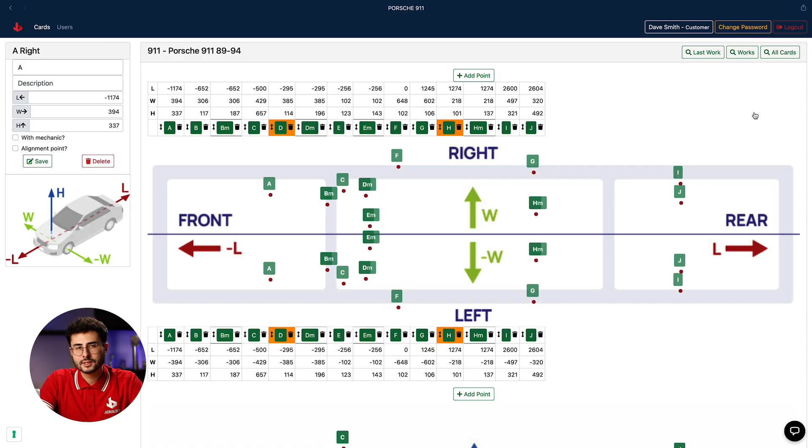In the previous video, we identified the alignment points, the stable and undamaged points on your car. For instance, I had defined point D and point H with the symmetrical ones as alignment points. It's important to focus a bit on these alignment points and especially verify their positions. They might seem to be in the correct position at first glance, which we hope for, but before repairing any damaged areas, it's always wise to verify if the alignment points are truly in their intended location.

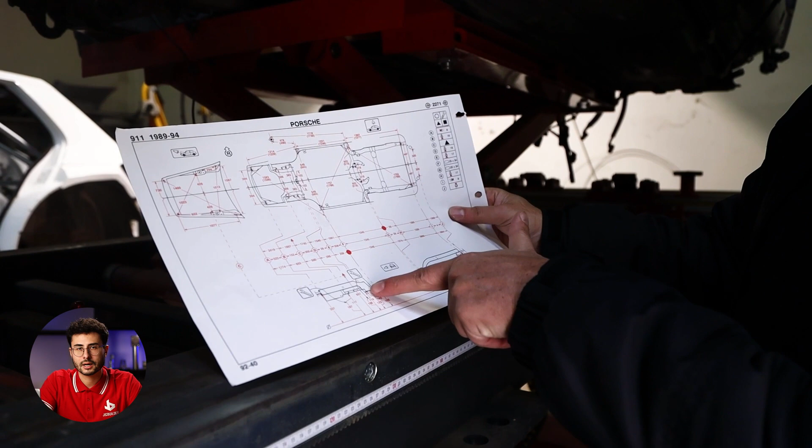To check the alignment point positions, we need to first identify them on the actual car structure. For this, all you'll need is some tape, a marker, and a bit of patience.

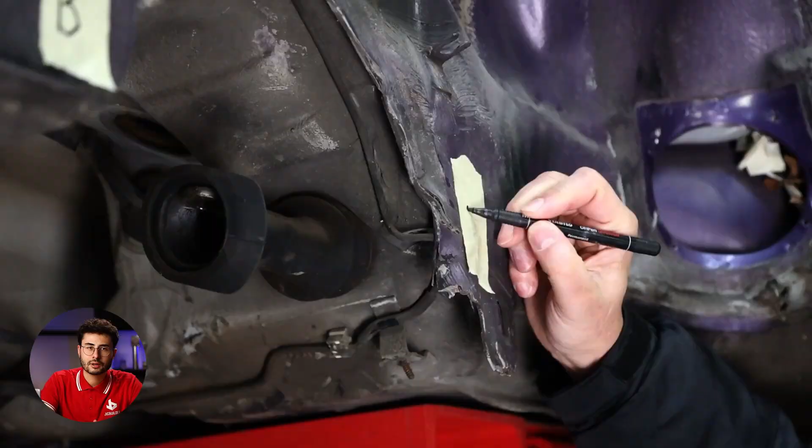After positioning the car on the bench, as you're surely used to, you'll mark on the physical car structure the points corresponding to the digital schema, using the marker to label them with their corresponding names. This phase of identifying the points is delicate and crucial to avoid any issues later on. Remember, JigBuilder requires a minimum of 4 alignment points for precise work.

Once the points are identified on the car, you can assemble the jigs as you are surely used to. I'll be waiting here for you once you're done with this task.

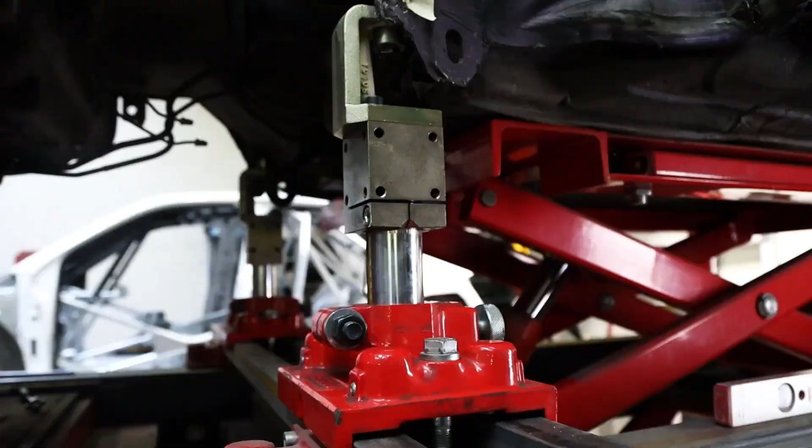Done? Great. Now let's return to our digital card. Once the card is open, click on the Works button, then Add Work.

The app will ask you to enter a description of the work you're about to do. In my case, I'm repairing a door, so my description will be Door Repair.

Additionally, the app will ask you to indicate the type of jigs you used on the real model. It's crucial to select the correct jig model that you are using. In my case, I select Coiro jigs. In the app, all the main jig brands are available to be selected: Global Jig, Thermomechanical Jig, Spanesi, PDA.

At this point, you'll find a screen with the basic points that you have previously entered in the card. The alignment points you selected in the card are shown in grey. What you need to do is to insert the coordinates of the alignment points resulting from the jigs.

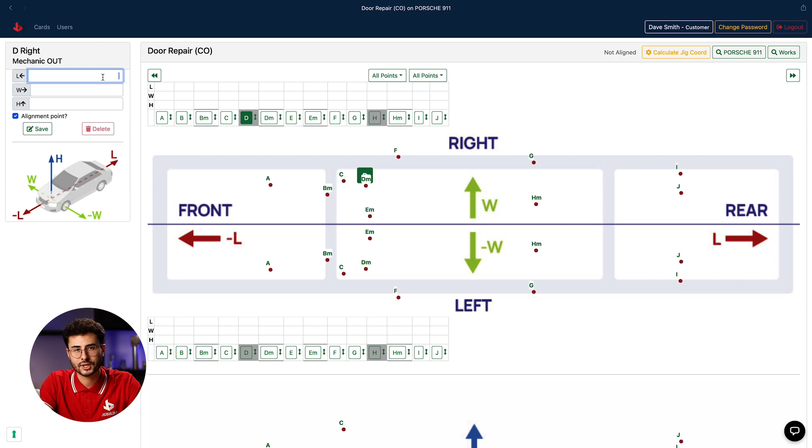Pay attention. Keep in mind to enter the negative or positive coordinate values as shown in the previous video. The arrows and letters on the application's base diagram will help you understand when the values need to be negative and when not. After entering the coordinates of the points, click on the first point again.

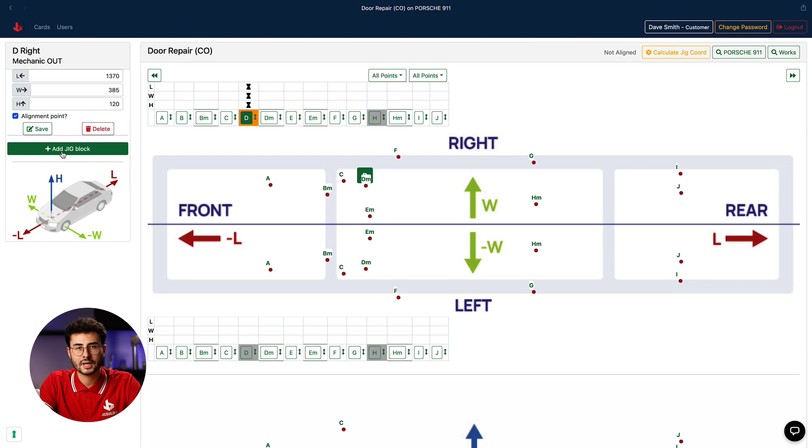You'll notice a new button under the table on the left side of the screen. Add Jig Block. What's it for? With this button, you'll select the jigs you used to reach that specific point. This way, the app can now verify if the alignment points on your car match the position they should have according to the card.

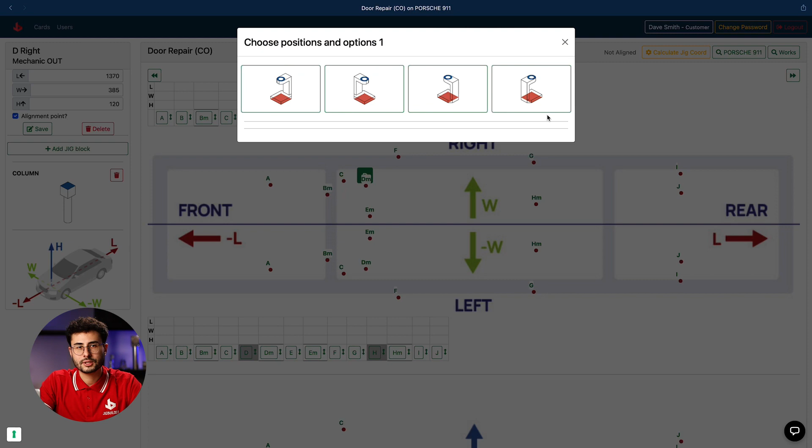Pay attention, you must be very careful in selecting the correct orientation for each piece. The colored face of the digital template indicates the face you used to attach it to the next piece.

If you've used the same combination of jigs for 2 symmetrical points, you can build the virtual template only once. Then, by clicking on the arrows next to the point's name, the app will automatically copy that sequence of blocks to the symmetrical point.

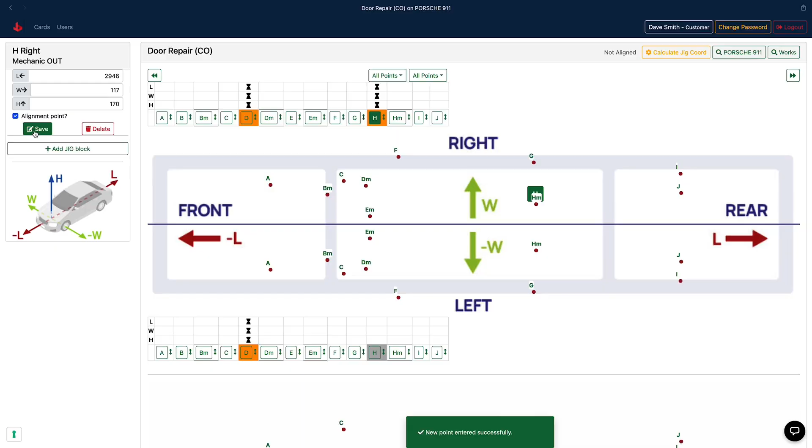Constructed all the virtual templates? Great! Now that the coordinates of the alignment points are identified on the car and the virtual templates are done, simply click the Calculate button.

This is the moment of truth. If the boxes with the alignment points coordinates turn green, the points are aligned. If the boxes turn red, the alignment points aren't aligned and you will have to choose other alignment points and restart the process. Notice that JigBuilder considers a point to be aligned when the displacement is lower than 3 mm.

But let's be optimistic. Let's assume that all the boxes turn green. It means that they are correct and you no longer need to worry about the alignment points for this work.

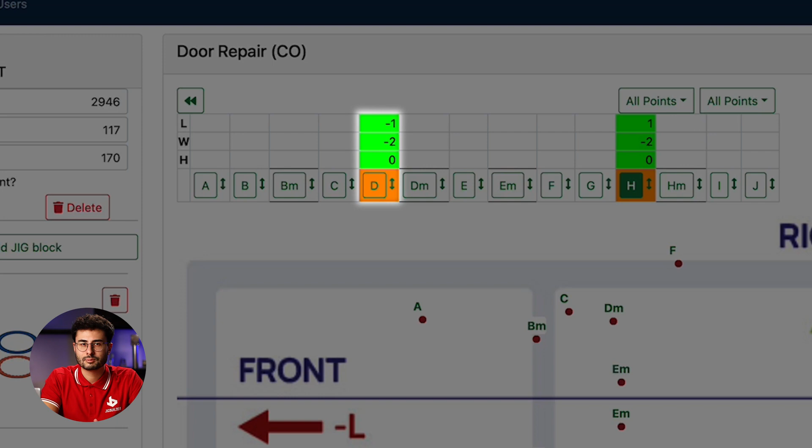However, you might have noticed that besides turning green or red, the boxes are also filled with a number. It's worth now to understand a bit better what these numbers mean. The value inside the box indicates the displacement of the alignment point on the car in relation to its intended position according to the card.

For example, if the point is displaced by -2, it means it's shifted 2 mm in the direction of the negative axis. It works the other way around with positive values.

Clear? I think we've squeezed our brains enough for today. We've verified that the alignment points are aligned, and that's something. Let's take another break and meet in the next video, where we'll check the status of the other points in the car, not just the alignment points.